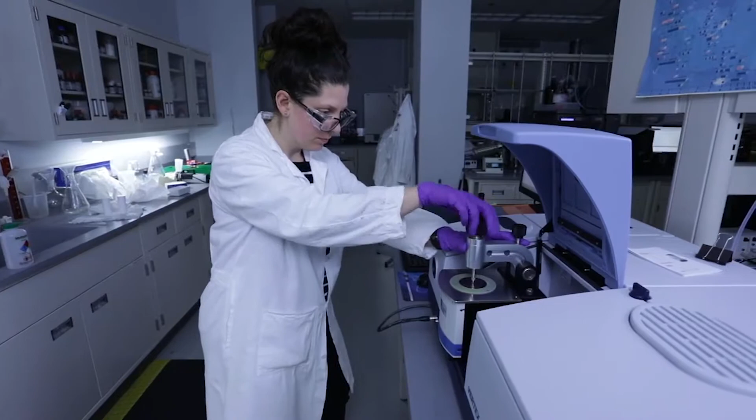NETL is also the only national lab dedicated to fossil energy research and development, which makes our team a sought-after national and international resource. Our lab is a hidden gem that is having a global impact, and the results of our research have touched the lives of millions of individual Americans as they go about their daily lives.

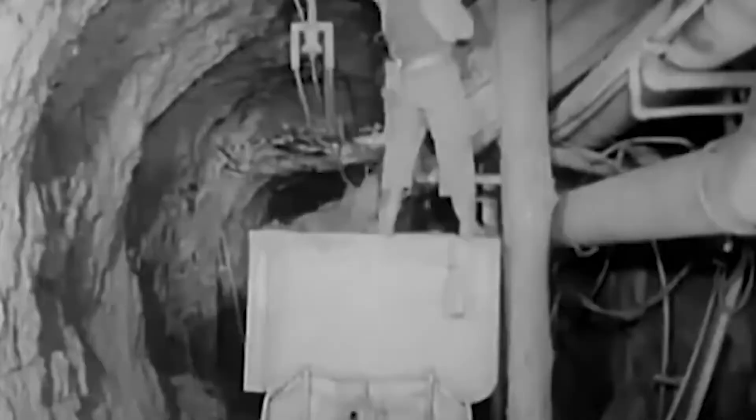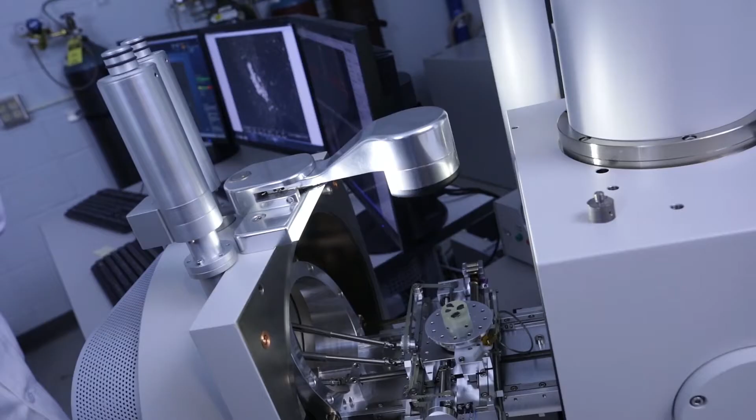From pioneering the technologies that enabled the shale gas revolution, to spearheading carbon capture and storage innovations and developing materials for next-generation energy systems, our forward-looking research continues to position NETL as the nation's renowned fossil energy science and engineering resource. Welcome to NETL. I'm Sean Plasynski, Deputy Director and Chief Operating Officer.

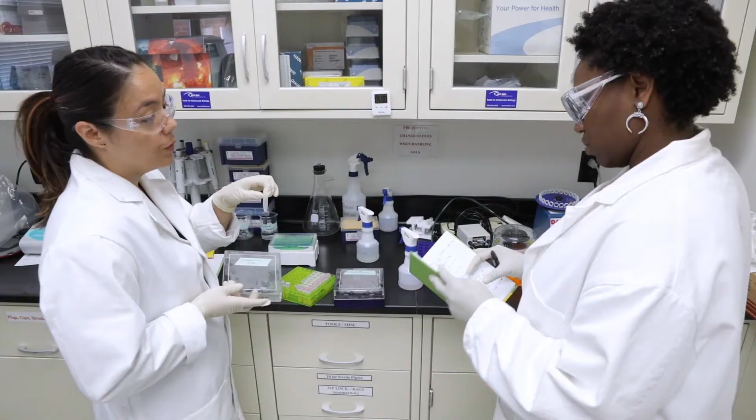NETL's Laboratory Operations Center manages a comprehensive, fully integrated suite of laboratory support services consistent with the NETL mission. Specifically, the laboratory operations responsibilities span facility operations, information technology, environmental safety and health, security and counterintelligence, records management, and human resources. The day-to-day support performed by the site operations support contractor includes R&D support services.

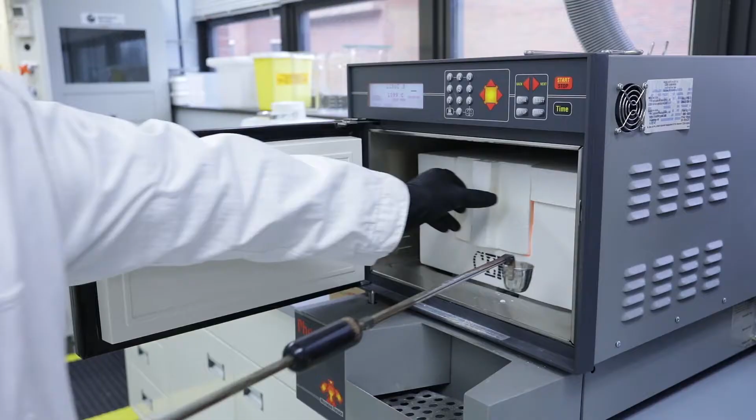This includes the technicians and operators necessary to operate the R&D equipment in our laboratories, and provides safety and engineering support for laboratory safety reviews and design of laboratory equipment. It also includes R&D equipment and materials, covering the purchase and receipt for the research areas.

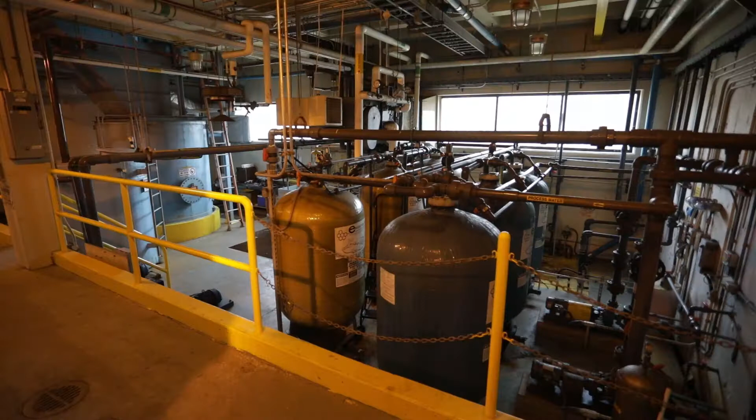Engineering and facility support services include the general engineering labor and materials necessary to complete the engineering, design, drafting, and drawing for various areas such as civil, mechanical, electrical, plumbing, utility locating, and construction inspection services. Facility support also includes maintaining the site's motor pool and shuttle services, warehouse and property management, janitorial and grounds maintenance for the Pittsburgh site.

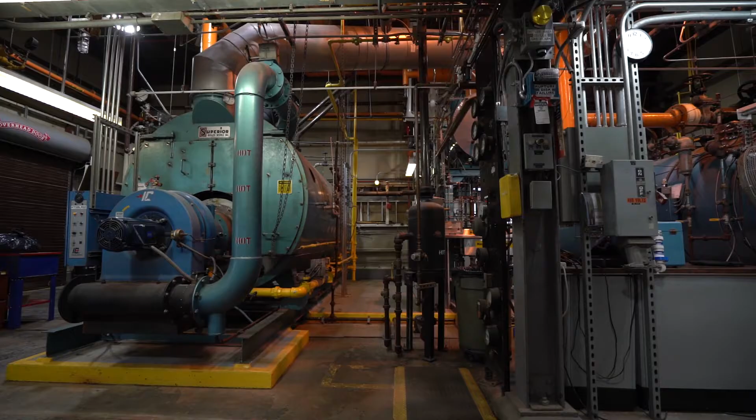Environmental safety and health support services include activities like air, water, and waste control, environmental data analysis, inspection support, and occupational health, which includes access to nurses and physicians—just to name a few of the services they provide.

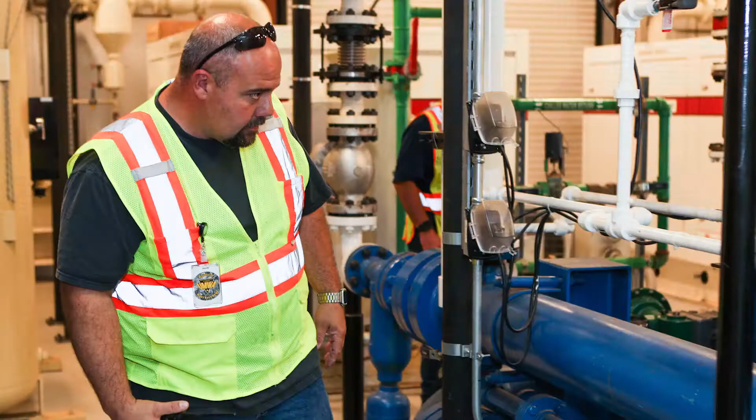The safety program includes reviews of operations, inspections and analysis, emergency notifications, fire and life safety protection, and accident and incident identification. The risk management and response program includes supporting the emergency management program through drills, training, and reporting.

For example, the industrial hygiene program includes exposure and workplace monitoring, ventilation programs, and radiation monitoring, just to name a few. The environmental remediation and disposal services include site monitoring in Wyoming, reporting and compliance with regulatory requirements, identification, characterization, and classification of regulated waste items, and processing items for chemical storage and waste disposal.

The NETL complex includes multiple sites operating as a one lab system. The lab's 3 R&D campuses are located in Morgantown, West Virginia; Pittsburgh, Pennsylvania; and Albany, Oregon. Let's take a closer look at our 3 research campuses.

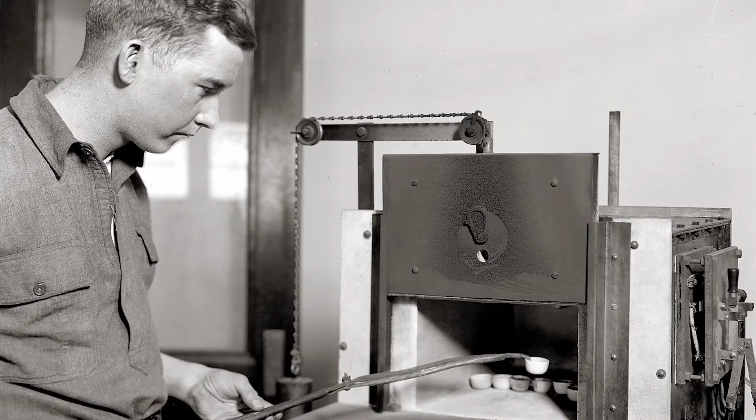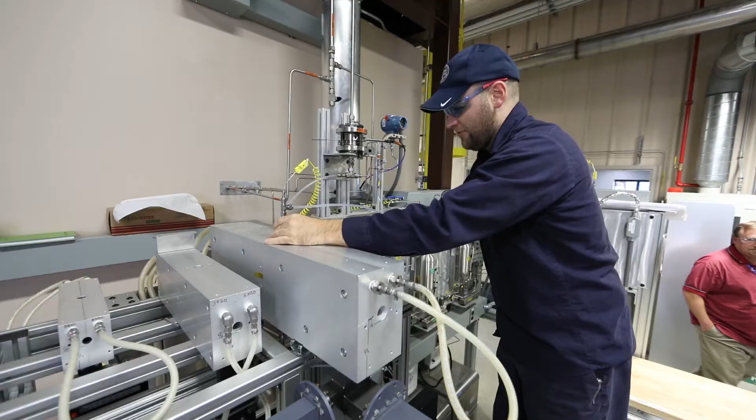NETL's Morgantown site was founded after World War II sparked national interest in synthetic fuels production and expanded federal support for research and development on fossil fuels. The Appalachian Experiment Station, as it was then known, was tasked with finding quicker, cheaper ways of gasifying coal to produce synthesis gas. Today, the Morgantown site plays a pivotal role in advancing innovative energy science and engineering.

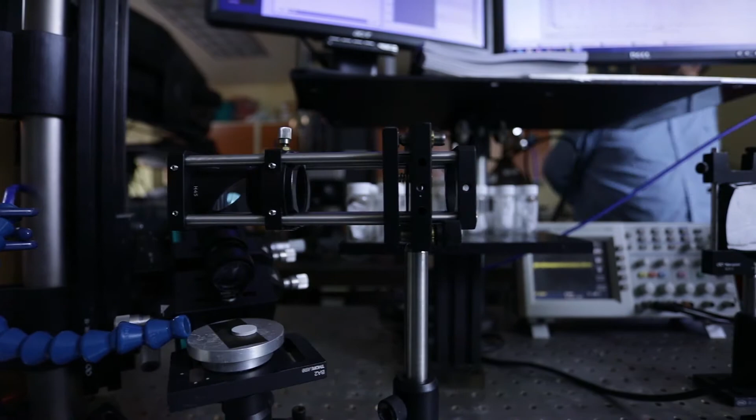With a focus on design and fabrication technologies, including unique specialty work, the site encompasses 48 buildings spanning 455,724 square feet, spread across nearly 140 acres. About 40 acres are occupied by site facilities that house 612 employees, including 226 federal and 386 contract workers.

The remaining 100 acres is covered with scenic woods that offer privacy and security. The replacement value of the Morgantown site facilities is nearly $247 million, with the newest addition, the B39 Technology Support Facility, built in 2008. The building is LEED certified, with a gold rating for the energy conservation incorporated into its design, which includes sustainable building practices and materials, a green roof, and judicious use of natural light and lighting controls for energy efficiency.

Let's take a look at some of our premier research labs in Morgantown. B14, the newly created Reaction Analysis and Chemical Transformation Facility, or REACT for short, supports NETL's energy conversion engineering efforts to increase power cycle efficiency and enable more power generation for less fuel and fewer emissions.

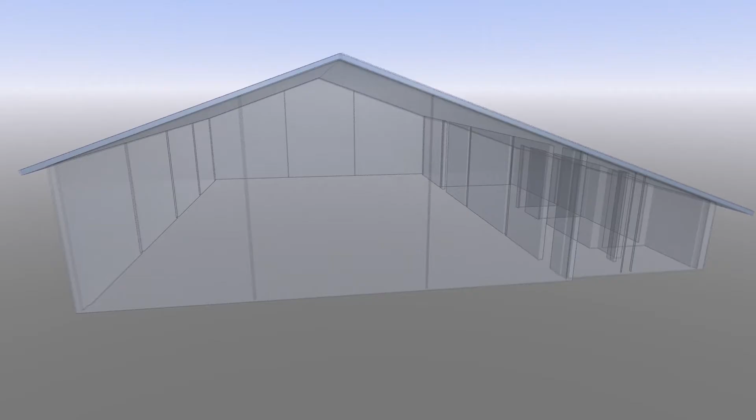The REACT facility features 8 unique reactor systems, including a mix of high-temperature, high-pressure, fixed-bed, and fluidized-bed reactors, as well as advanced microwave and plasma-energized systems. The facility is fuel-flexible, enabling the study of a variety of feedstocks, and is designed for fully automated 24/7 operations.

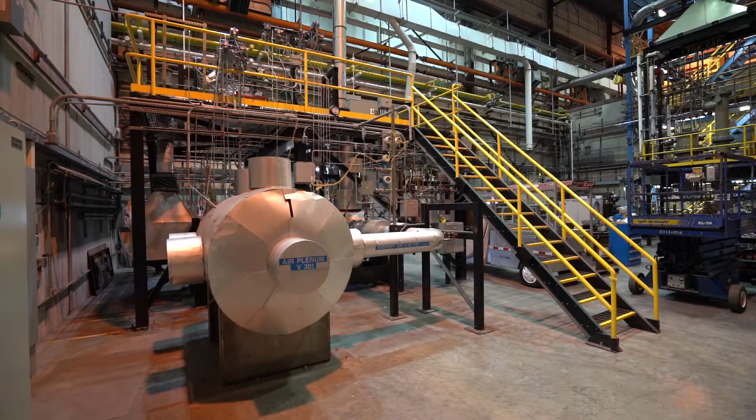Building B4 houses 3 unique laboratories. The Hybrid Power Systems Performance Lab is the only hardware-based cyber-physical simulation of an advanced hybrid power system anywhere in the world. This one-of-a-kind facility develops control strategies and explores operating flexibilities for the reliable coupling of fuel cell and gas turbine technologies.

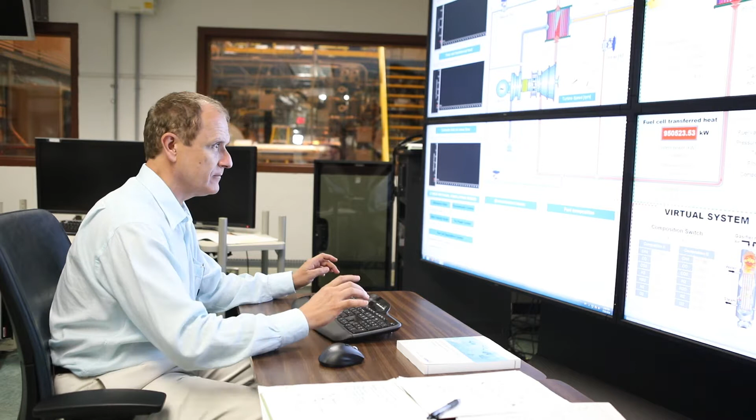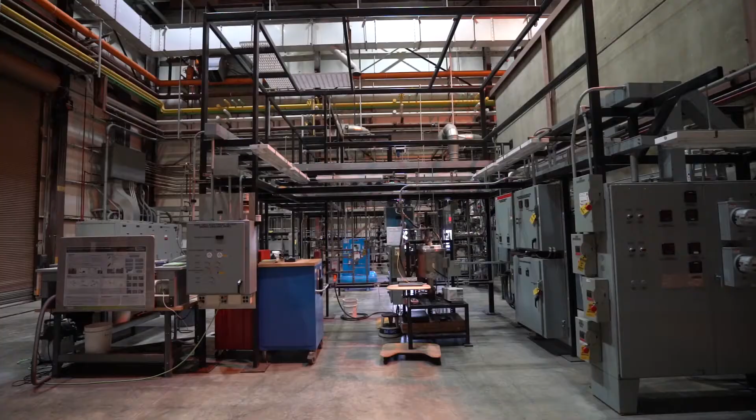The Chemical Looping Reactor Facility is a pilot-scale reactor facility that aims to advance transformational chemical looping combustion technology. The solid oxide fuel cell manufacturing and test labs are equipped to test solid oxide fuel cells and component materials at temperatures up to 1,000 degrees Celsius under various gas atmospheres and operational conditions.

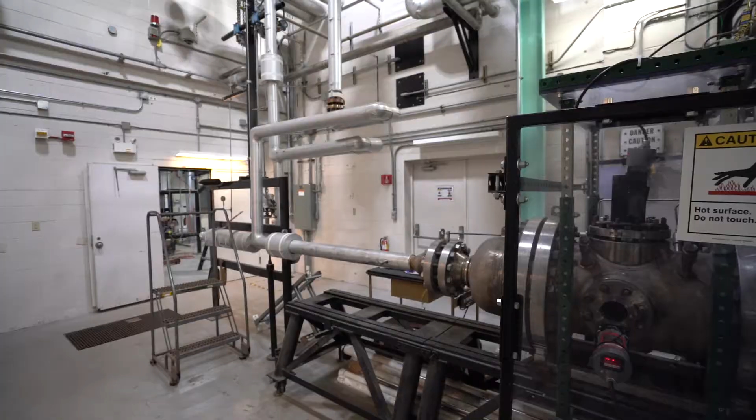B6, the high-pressure gas turbine combustion facility, offers the test capabilities necessary to evaluate new combustion concepts for high-pressure, high-temperature hydrogen and natural gas turbines. To model and study fluid flow and combustion variability, researchers use computational fluid dynamics and the Dynamic Gas Turbine Combustion Test Rig to gain insights into complex combustion processes.

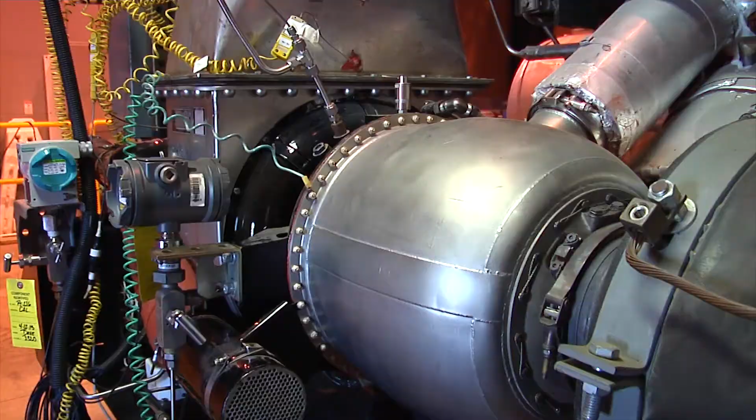The Simulation Validation, or SimVal, unit is a unique optical combustor for analyzing high-pressure combustion and validating computational fluid dynamics models. B17, the Geological Sciences Lab, houses NETL's computer-aided tomography, or CT, equipment, which is used to obtain data on flow dynamics and internal structures of geologic media.

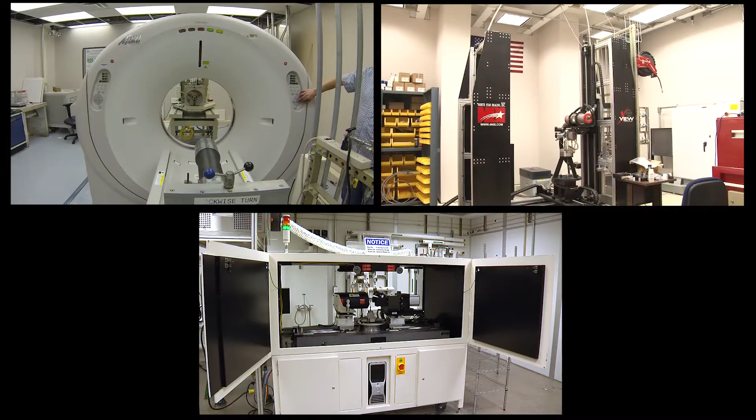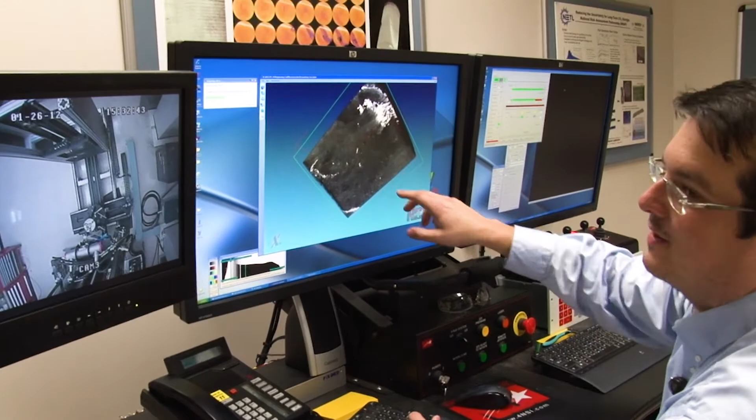The lab's 3 CT scanners - medical, industrial, and micro - enable researchers to examine different phenomena, from dynamic fluid floods within rocks at in situ conditions to the isolation and complexity of pore structures and material features. Research in this facility focuses on examining the fundamental physical phenomena that control flow in the subsurface, including geologic carbon storage, gas and oil production, wellbore integrity, and flow through fractured rock.

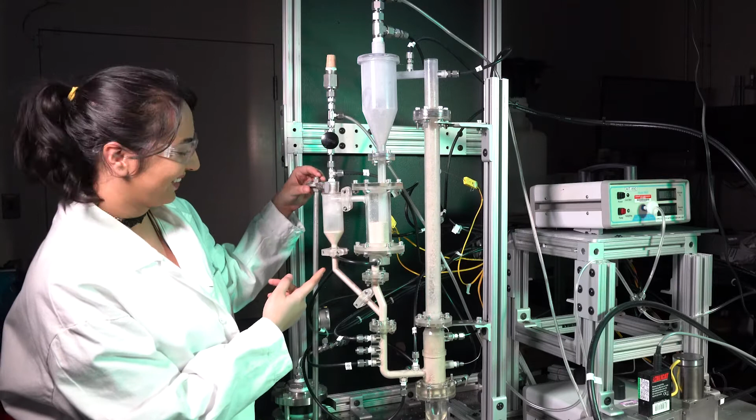Building B25 also serves multiple purposes, housing several critical laboratories. The Multiphase Flow Analysis Laboratory provides tools for fundamental tests on particles and flowing particle systems to support multiphase model development and validation. The lab has capabilities to perform detailed characterization of particles for a broad range of fluidization and particle flow systems, providing fundamental information for accurate computational modeling as well as high-quality data for validation of model predictions.

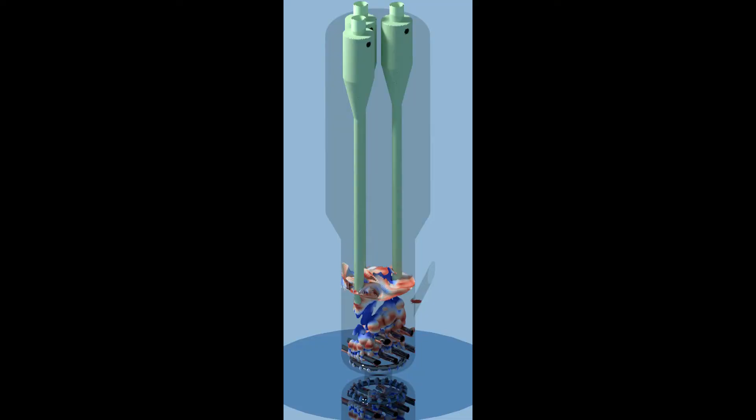The Laser Laboratory is used to develop and demonstrate laser-based sensor technologies that allow for monitoring under extreme conditions, such as high temperature and pressure, for incorporation with advanced next-generation control systems.

Joule is among the world's fastest, largest, and most energy-efficient high-performance computers. The system underwent a $16.5 million investment that increased its computational power by 8 times, ranking it 23rd in the United States and 52nd in the world. Joule 2.0 is housed in an energy-efficient modular data center.

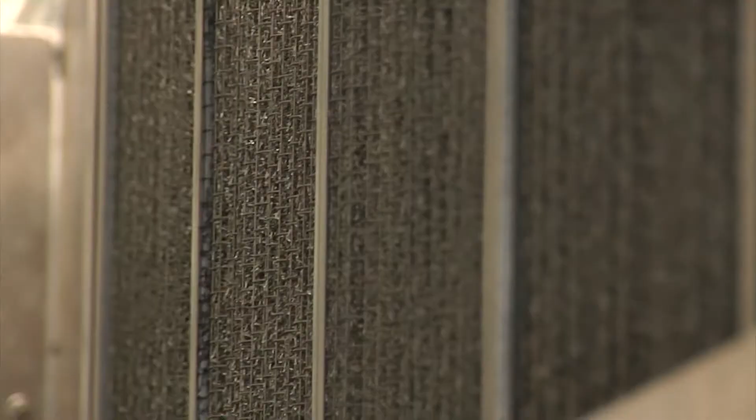Similar to a large air handling unit, the facility circulates ambient air, moved by 48 variable-speed fans, augmented with evaporative media, to cool the supercomputer using just 2 to 5% of the power consumed.

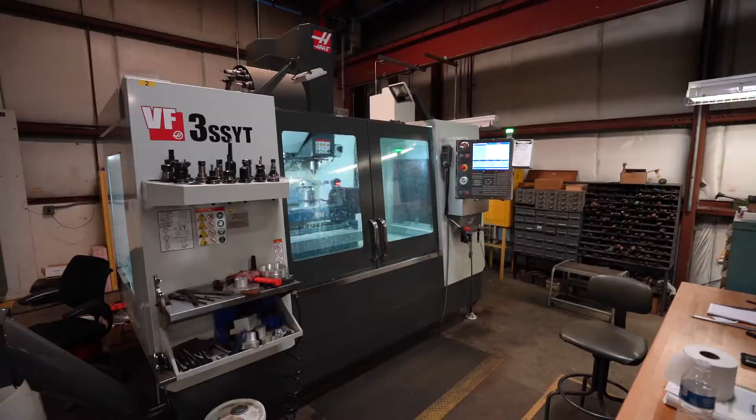In addition to offices and laboratories, the NETL Morgantown site features a large machine shop with both traditional and state-of-the-art computerized numerical control machining capabilities, a children's daycare facility that has geothermal heating and cooling as well as solar power and lighting features, a fitness center, an occupational health unit, an independently operated cafeteria, and a 349-space parking garage.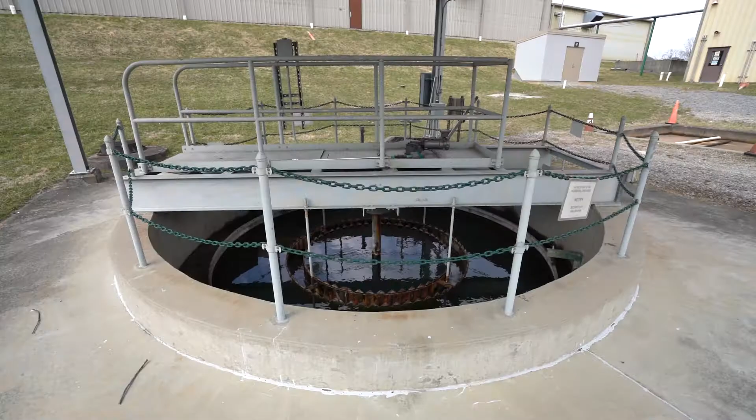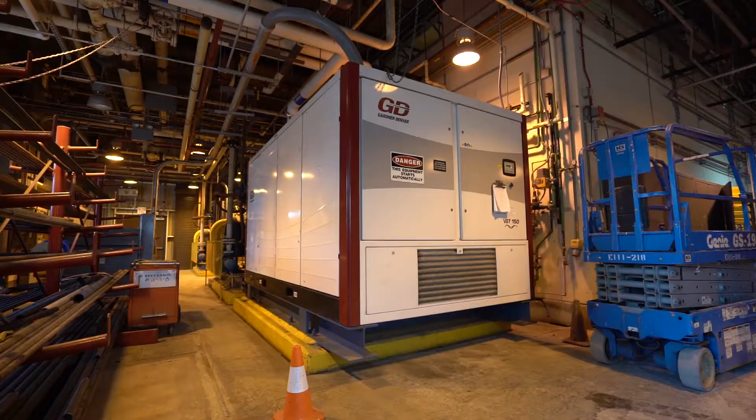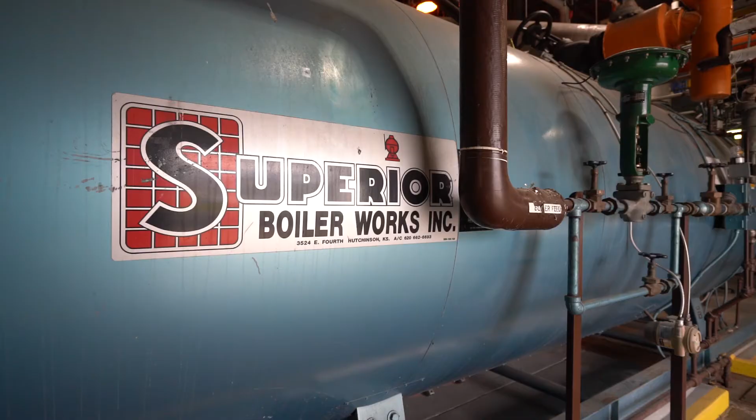Morgantown also has several unique infrastructure capabilities, including a dedicated water treatment collection and processing facility for industrial waste, a 23 kilovolt to 4,160 volt electrical substation and underground distribution network, a compressed gas system that provides 100 and 700 psi air, compressed nitrogen, compressed natural gas, and high-pressure hydrogen, a central steam boiler and chiller that serves several facilities throughout the site. In support of the R&D program, a dedicated process cooling tower and associated underground distribution system provides process cooling water to buildings 4 and 6.

A motor pool area is designed to maintain NETL's fleet of vehicles, which includes alternative fuel vehicles and shuttle vans used 4 days a week to facilitate travel between the Morgantown and Pittsburgh sites. Snow removal from roadways is included in site operations and features a dedicated bulk salt storage facility.

NETL Morgantown also features a large warehouse and a dedicated hazardous waste handling facility where regulated materials are collected and prepared for disposal. Field communications capabilities at the facility are enhanced by a dedicated radio repeater system with dedicated channels for operations and other groups.

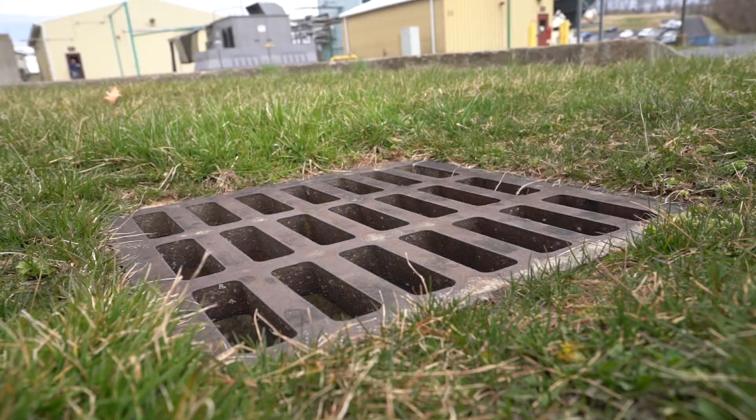NETL is an ISO 14001 and OHSAS 18001 certified facility. Key aspects of the environmental support functions at the facility include dedicated groundwater monitoring wells, stormwater management and protection as well as associated sampling, and industrial wastewater system operation, which is permitted through publicly owned treatment works. The Morgantown facility does not currently require an air permit, but air emissions are inventoried to ensure ongoing compliance.

NETL is an OSHA-regulated site, and safety oversight is provided by a mix of federal and contractor workers. Other significant support efforts managed by the Environmental Safety and Health Program include safety analysis and review systems, industrial hygiene, emergency response, and technical support of external remediation efforts that are federally managed from Morgantown.

NETL's Pittsburgh site is located within Allegheny County, Pennsylvania, at the Bruceton Research Center, approximately 13 miles south of Pittsburgh in South Park Township.

NETL shares the Bruceton Research Center with CDC NIOSH, the Center for Disease Control National Institute for Occupational Safety and Health. The U.S. Department of Labor's Mine Safety and Health Administration also occupies part of the CDC NIOSH grounds. NETL Pittsburgh is unique among NETL's research sites because it comprises 4 separate facility plateaus: administration, research laboratories, daycare facility, and a fitness center. Employees access various roads, including township, state, and railroad crossings, to travel between the various plateaus, in some cases passing through CDC NIOSH.

The lab has an asset replacement value of $207 million. 547 employees work at NETL Pittsburgh, including 224 federal and 323 contractor staff. The site operations support contract supports NETL Pittsburgh's 30 buildings and 57 acres, including janitorial and ground services. The campus holds 431,000 square feet of building space, including a maintenance shop, a warehouse, a recycling facility, a children's daycare facility, and a fitness center.

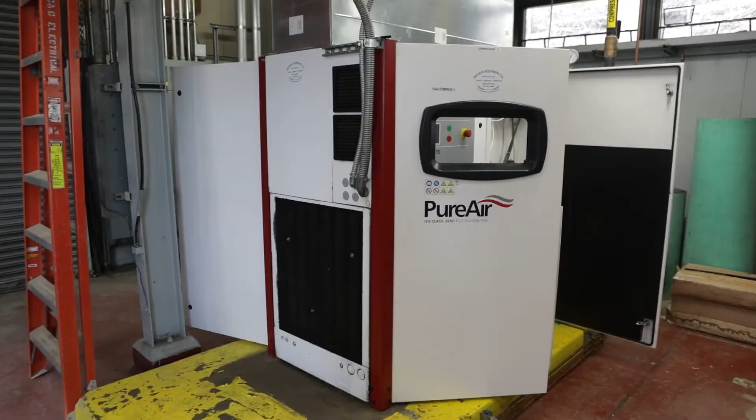Pittsburgh also has several unique infrastructure capabilities, including a dedicated chemical handling facility where regulated materials are accumulated for disposal, a dedicated wastewater treatment collection and processing facility for industrial wastewater, a machine shop, a compressed air system that provides 100 psi air to laboratory buildings, a 100 psi nitrogen distribution system, including an 11,000-gallon liquid nitrogen storage tank with a liquid nitrogen Dewar filling station, an electrical substation, an occupational health unit, and an independently operated cafeteria.

A motor pool area is designated to maintain NETL's fleet of GSA-leased vehicles, which includes alternative fuel vehicles, all-electric vehicles, and shuttle vans used 4 days a week to facilitate travel between the Morgantown and Pittsburgh sites. An on-site fueling station with storage tanks of E85, diesel, and gasoline is used to refuel on-site vehicles and equipment. 2 electric vehicle charging stations are installed to charge government and employee vehicles.

Snow removal from roadways is included in site operations and features a dedicated bulk salt storage facility. Field communications capabilities at the facility are enhanced by a dedicated radio repeater system with dedicated channels for operations and other groups. NETL is certified to the ISO

14001:2015 and OHSAS 18001:2007 standards, which require environmental, safety, and health conformance. Consequently, conformance to these standards is the basis for NETL's Environmental, Safety, and Health, or ES&H, management system. Key aspects of the lab's ES&H support functions at Pittsburgh include dedicated groundwater monitoring wells and stormwater management and protection, as well as associated sampling.

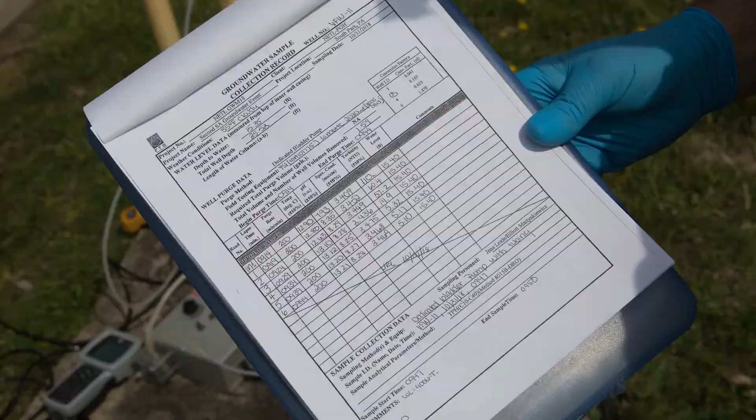ES&H support functions also include industrial wastewater system operation, which is permitted through the publicly owned water treatment works. The Pittsburgh facility does not currently require an air permit, but air emissions are inventoried quarterly to ensure air quality standards are not being exceeded.

NETL is committed to being OSHA compliant. The safety oversight function is provided by a mix of federal and contractor staff. In addition, ES&H program support also includes the safety analysis and review systems, industrial hygiene support, and emergency response support.

Much of the research and development at the Pittsburgh campus focuses on wet chemistry. Here are some highlights of our research labs.

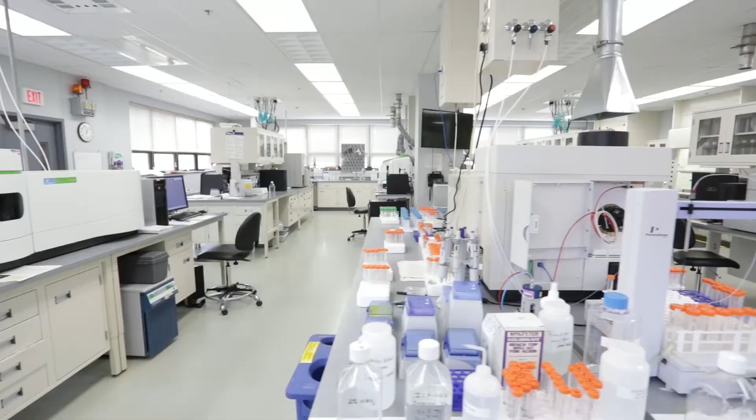B83, the Analytical Lab, conducts research on rare earth elements, or REEs, investigating the economic feasibility of recovering REEs from U.S. coals and coal byproducts. The research is focused on developing process designs that minimize or reduce the environmental, safety, and health impact of radioactive and other byproducts of REEs, and optimizing the overall economic benefits of the separation and recovery process. Characterization of materials containing REEs is key to developing technology and processes that will provide reliable and competitive domestic sources of REEs, metals critical to today's technology.

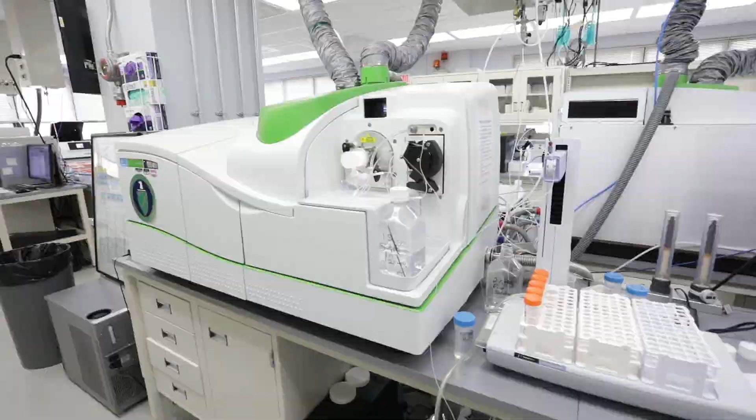B84, the Subsurface Experimental Lab, focuses on enhancing carbon storage technologies through the use of pressure vessels that simulate the pressures and temperatures found deep underground. Studies in this laboratory evaluate the impact of multiphase flow, chemical precipitation and dissolution, and geomechanical stress on flow properties. The Subsurface Experimental Lab equipment makes it possible to accurately characterize geologic formations and predict how carbon dioxide, or CO2, will behave following underground injection.

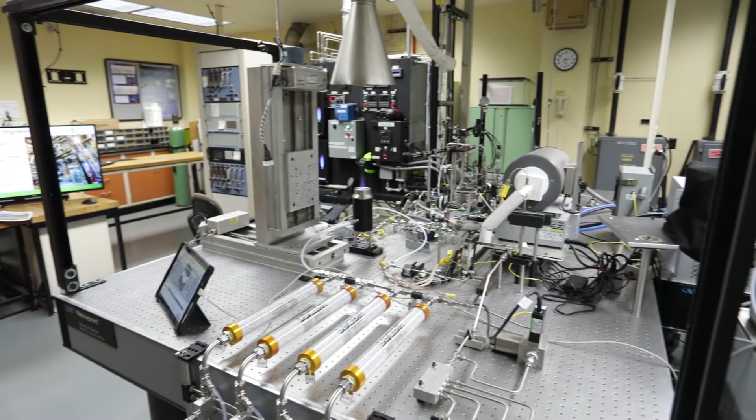B84, the Combustion Fundamentals Lab, focuses on advanced power generation concepts that utilize oxy-combustion. In this lab, researchers sample product gases from a flat flame burner operated with pre-mixed oxy-fuel with steam and CO2 dilution. The properties measured for the oxy-fuel flame provide valuable data to validate fundamental simulations of advanced energy concepts.

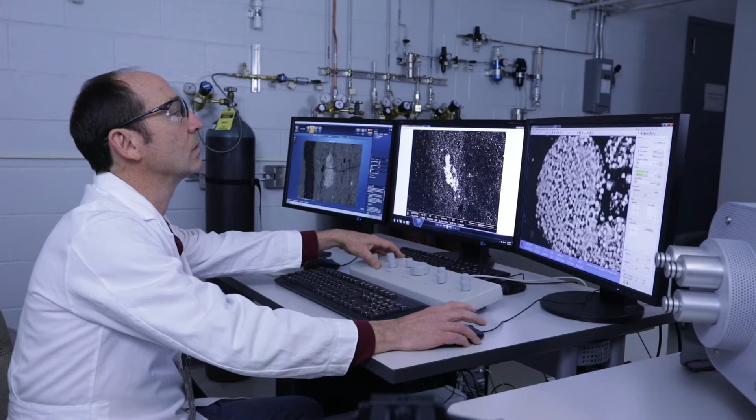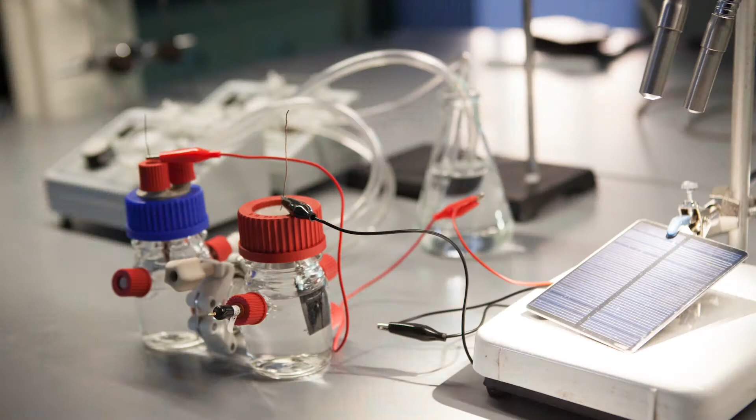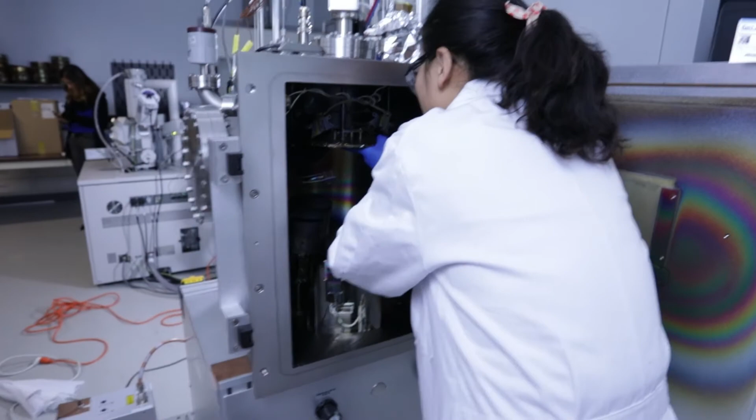B94, the Computational Materials Engineering Lab, is performing research related to using domestic coal and coal byproducts as a manufacturing feedstock for carbon materials. These materials include lightweight carbon fiber composites, carbon additives for construction materials, battery and electrode materials, and carbon nanomaterials. Research takes advantage of NETL's Functional Materials Development Center, which contains 5 floors of synthesis laboratories, instrumentation, and personnel for manufacturing and testing functional materials.

Research also takes advantage of NETL's Carbon Materials Manufacturing Facility, which contains specialized synthesis equipment and personnel for processing coal and producing 5 to 10 liter batches of graphene fluids for materials manufacturing applications.

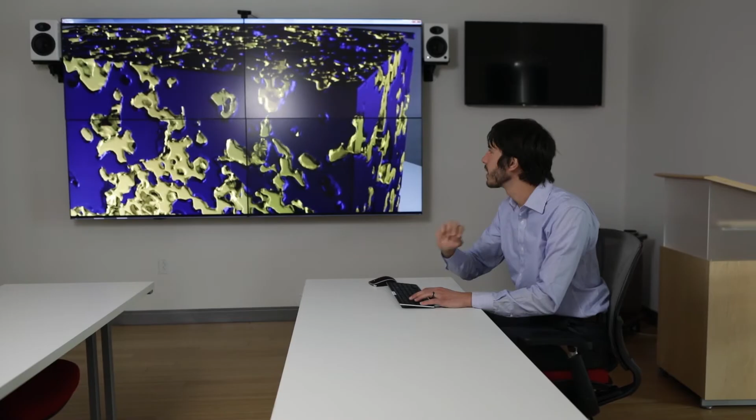NETL's Albany Lab traces its origins to 1943, when President Franklin D. Roosevelt announced that Albany was selected as the site for the new Northwest Electrodevelopment Laboratory. Today, NETL's Albany Research Facility is the site of leading-edge metallurgy and materials research.

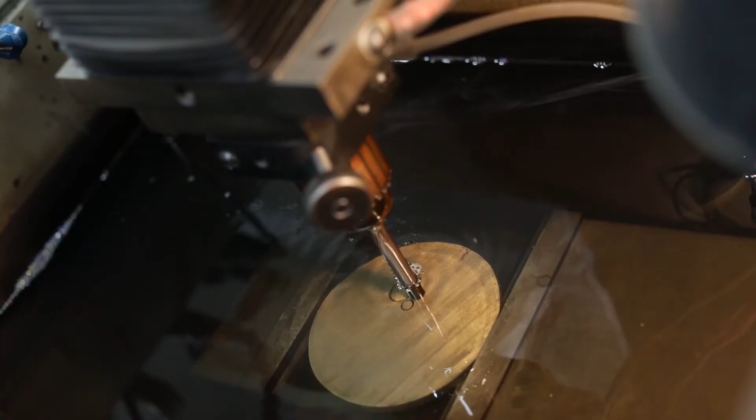NETL Albany is composed of 38 buildings, with 253,894 square feet of building space on 43.9 acres, with some buildings eligible for listing in the National Register of Historic Places. In addition to offices and laboratories for conducting cutting-edge research aimed at developing technologies to enhance our nation's energy dominance, the facility includes sheet metal, welding,

carpentry, electrical, machine and plumbing shops, a hazardous waste facility, and chemical storage facilities. The lab has an asset replacement value of $115.9 million.

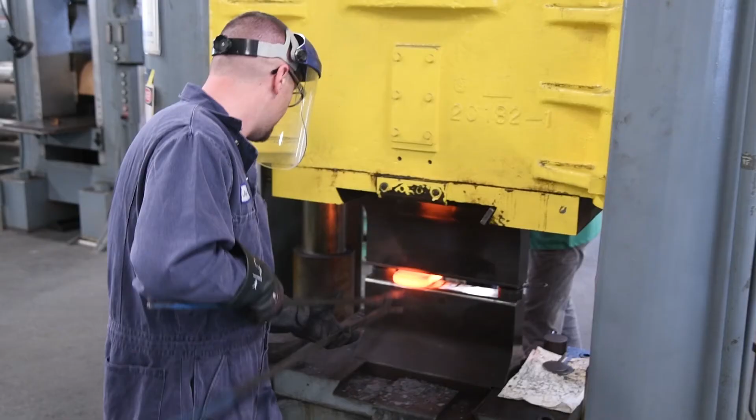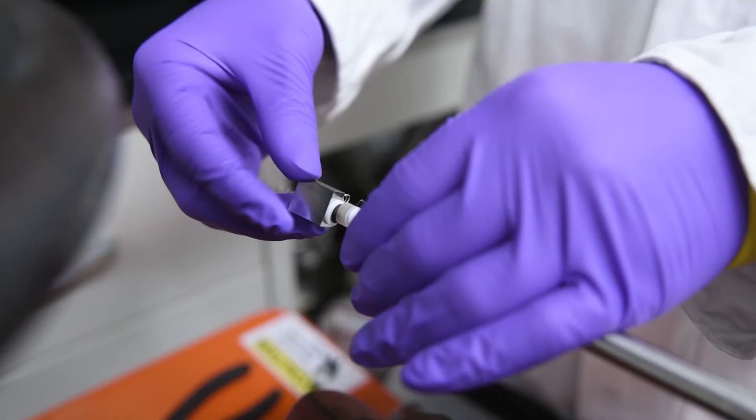126 employees work at NETL Albany, including 35 federal and 91 contractor staff. Our facilities include bench and intermediate-scale metals fabrication and melting capabilities, a full complement of metal processing and materials characterization, materials performance capabilities, and computational resources necessary to design and engineer new structural materials, advanced subsurface technologies, and direct power extraction. Continued upgrades are required to maintain strong capability in these domains.

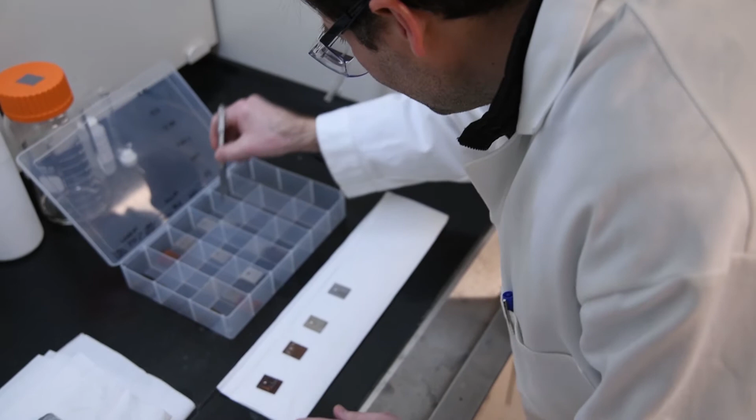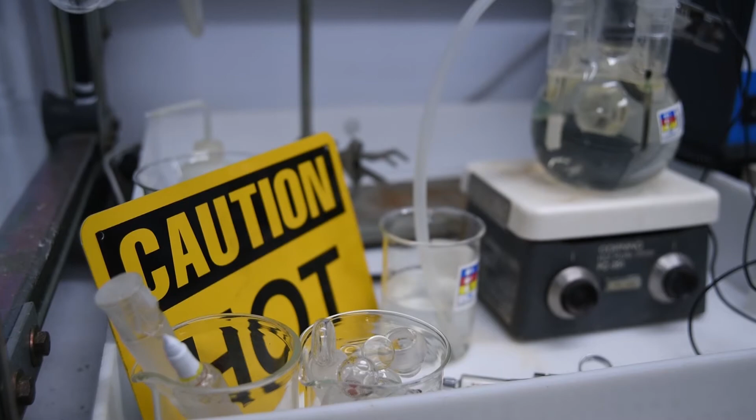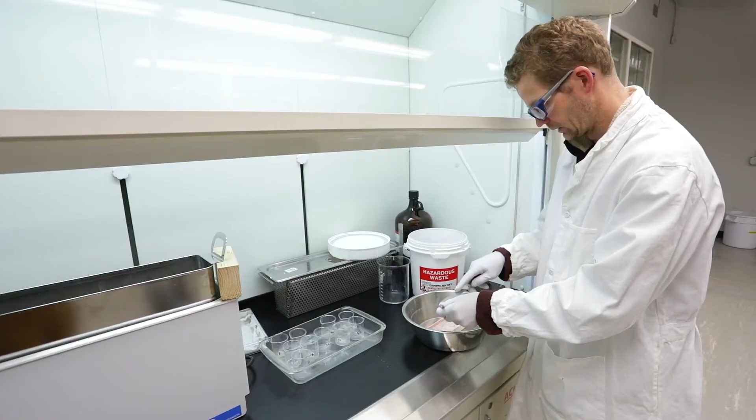NETL's capability in structural materials research is anchored by its substantial alloy fabrication and performance testing facilities, which deliver high-performance, affordable materials that enable diverse energy technologies. Researchers specialize in the design, fabrication and manufacturing, performance assessment, and performance prediction of heat and corrosion-resistant alloys. Complementary computational materials research is integrated into these activities to guide alloy development and manufacturing research and to predict materials performance. Research focuses on cost-effective materials for severe stress and corrosive-erosive environments with service life of 100,000 hours.

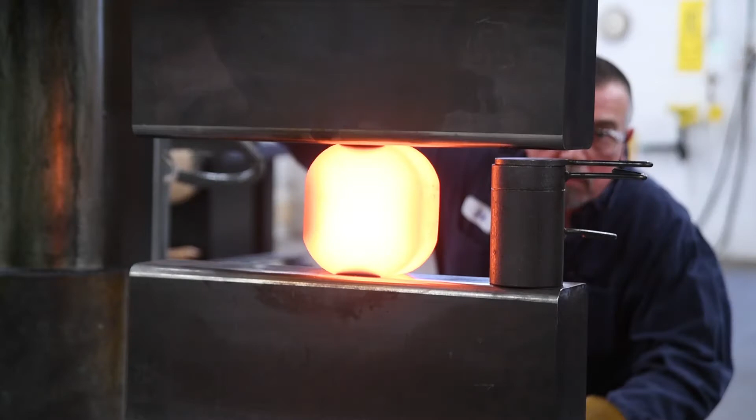NETL maintains a complete alloy development research capability, which includes the metals melting facility and the metals fabrication laboratory. Because of NETL's scale of alloy production capabilities, NETL's alloy solutions readily translate into industrial practice. This capability has been used to advance the DOE mission and has also been leveraged by other government agencies and the private sector to provide alloy solutions to materials challenges in the defense, aerospace, and biomedical fields.

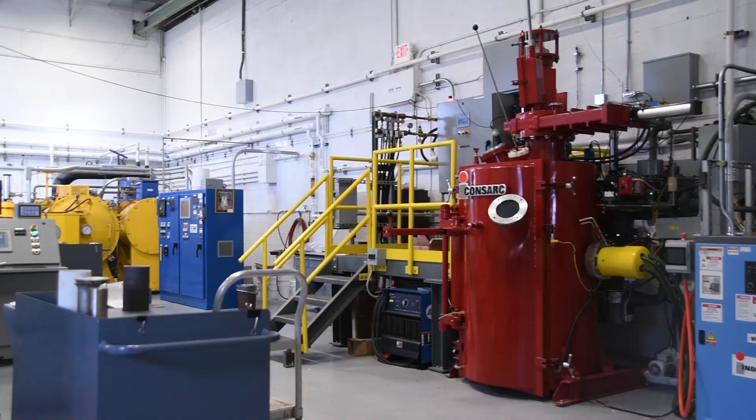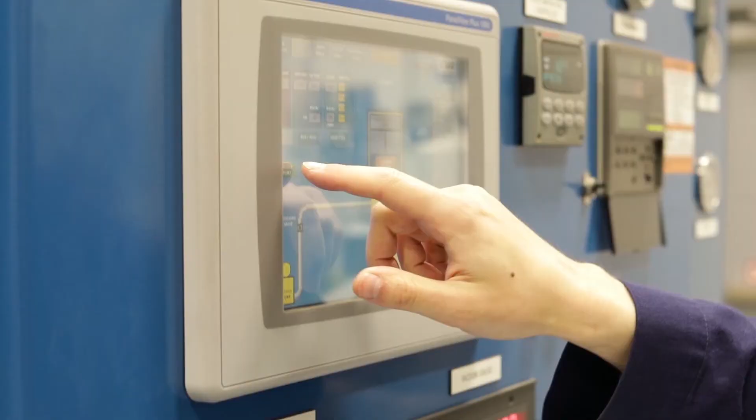Here are some highlights of our research labs. B4, the metals melting facility, is used to formulate unique alloys designed for use in extreme environments. Metals are developed in the laboratory's high-temperature furnaces, and molds are used to cool the resulting alloy into ingots, which are then heat-treated to homogenize the structure.

Formulated metal alloys are machined using a bandsaw, lathe, and other equipment in preparation for hot working in the fabrication facility. The metals melting facility can melt any metals needed for NETL research, resulting in batches ranging from a few grams to over 400 pounds.

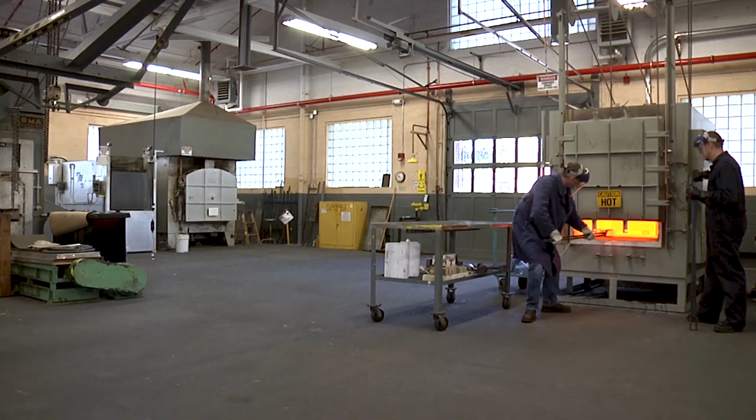Alloy ingots are typically produced by air induction melting, vacuum induction melting, vacuum arc remelting, electroslag remelting, or button melting operations. B30, the Metals Fabrication Laboratory, specializes in the research to produce plate and other shapes needed for assessment of new alloys for use in energy-related applications.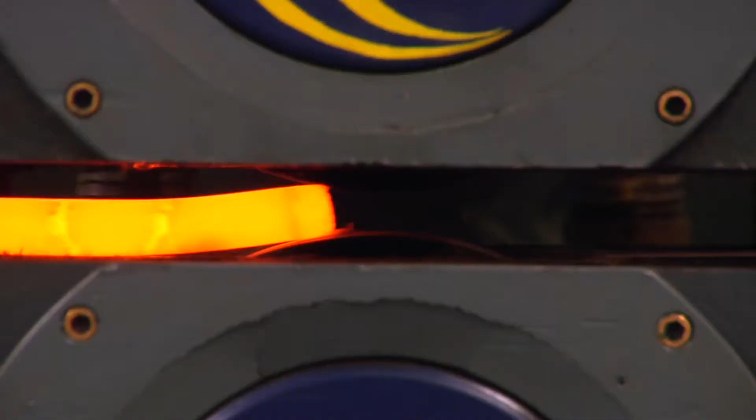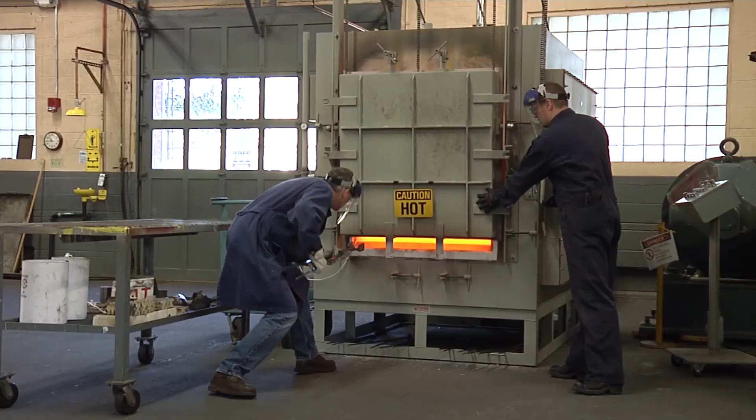Ingots come to the laboratory from on-site melt operations and are formed into plates, sheets, rods, and other shapes. The techniques employed mimic industrial manufacturing processes, resulting in useful microstructures that are key to evaluating a material's performance. Most operations in the laboratory are considered hot working and are performed on heated materials. The laboratory's equipment includes large heat treatment furnaces, a 500-ton hydraulic press, and a 750-ton hot rolling mill.

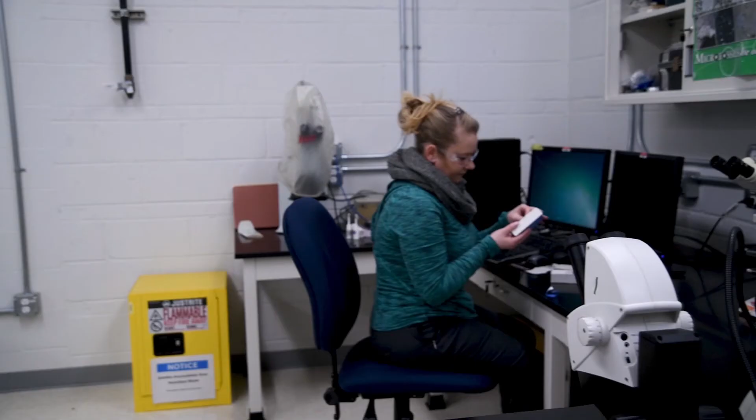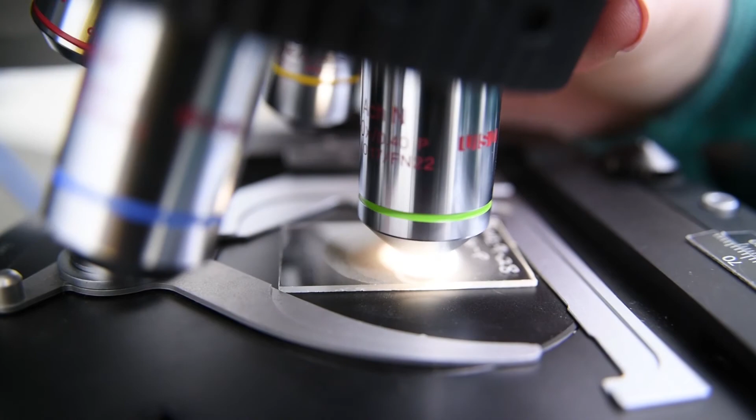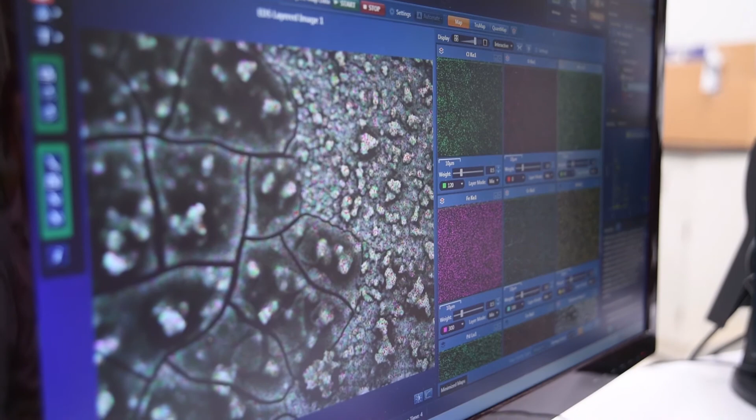B31. The analytical laboratories allow for the analysis of engineered and natural materials from the nano to macro scale. NETL Albany's petrography and metallography capabilities include optical microscopy, electron microscopy, confocal laser scanning microscopy, and X-ray diffraction. The use of microanalysis, combined with image processing visualization techniques, allows for the identification and quantification of elements and phases of interest. NETL leverages materials characterization capabilities resident at all three sites to provide access to capabilities.

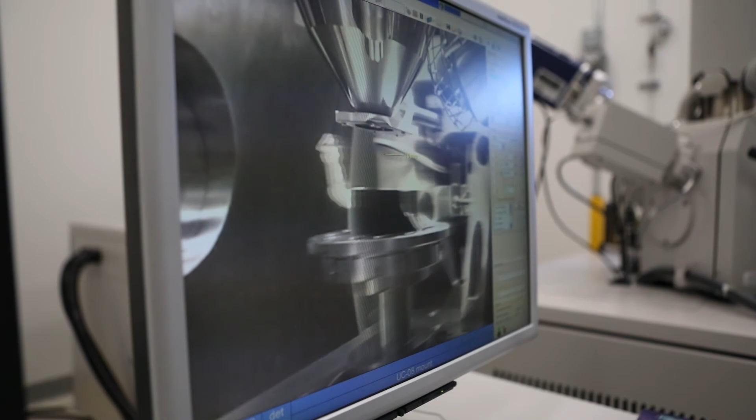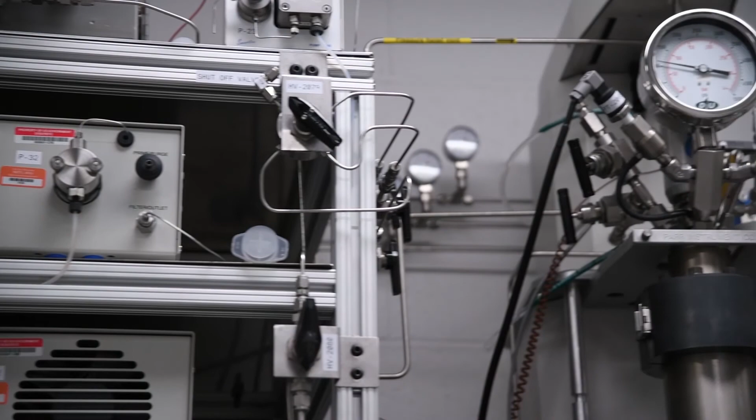B26, the High-Pressure Immersion and Reactive Transport Laboratory, is a multifunctional, state-of-the-art facility capable of performing geological studies at simulated depths up to 10,000 feet, providing an experimental basis for modeling of various subsurface phenomena and processes. The laboratory has a wide range of tools and instrumentation to ensure a complete cycle of scientific studies. The laboratory contains rocking autoclaves and continuously stirred autoclave reactors, which are used to conduct experiments at high pressures and temperatures to investigate geochemical interactions.

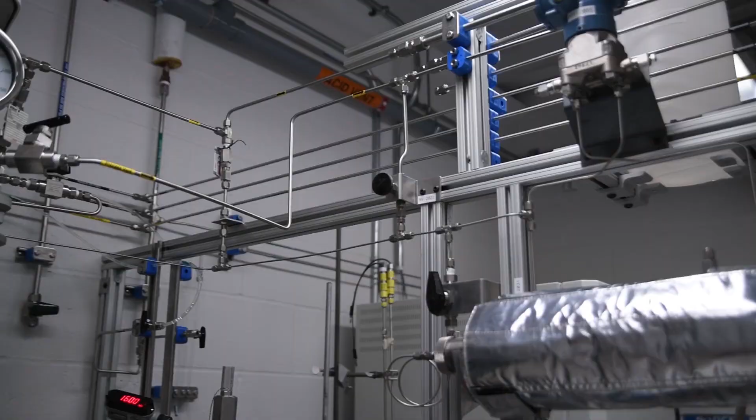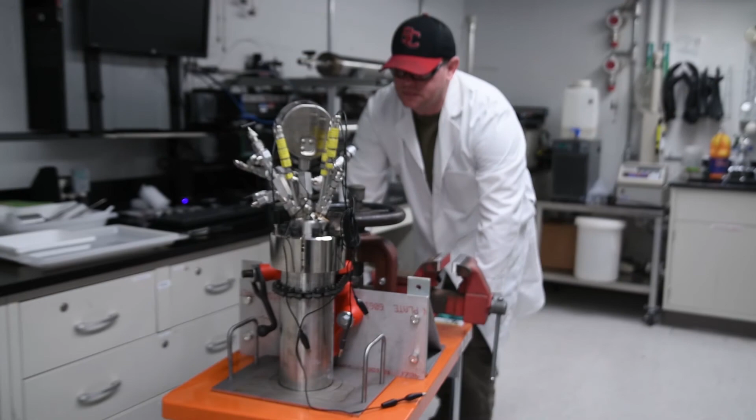The laboratory also includes several flow-through systems that can simulate CO2-enhanced oil recovery, CO2 water-rock interaction of core samples under CO2 storage conditions, and simulate the interaction between drilling fluids and the borehole wall.

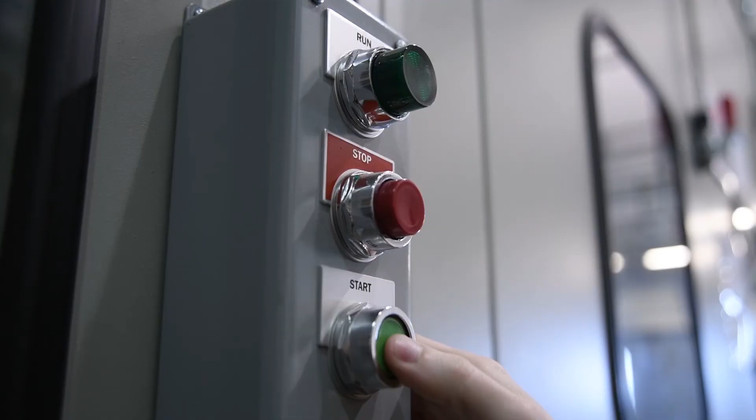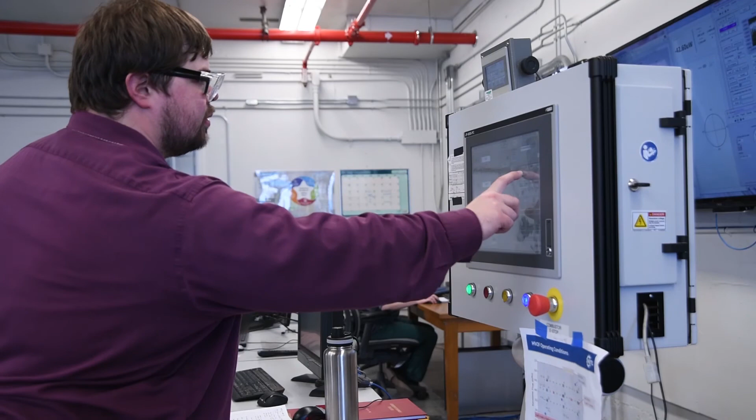B24. The MHD laboratory is used to perform model validation for magnetohydrodynamics, or MHD, energy conversion applications. The lab is also used to conduct materials performance evaluations for those applications. MHD is a scientific discipline interested in the interaction of an electrically conductive fluid with a magnetic field. An MHD generator is a new type of turbine in which usable electric power is generated without any moving mechanical parts. This process of MHD energy conversion is sometimes called direct power extraction.

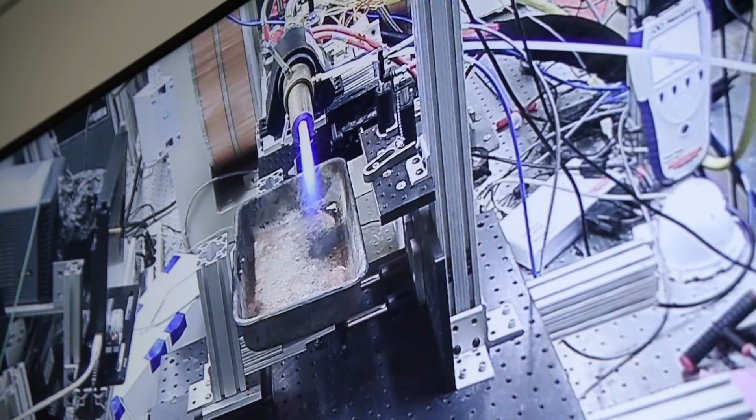Major test hardware in the lab includes an oxy-fuel combustion system capable of producing high-temperature supersonic gas flows, a 3 Tesla capable electromagnet, and an ultraviolet excimer laser.

NETL is one lab, operating as 3 research sites to provide technology solutions to America's energy and environmental challenges. The Site Operations Support Contract is instrumental in ensuring smooth, productive operations at these 3 research sites in Pittsburgh, Pennsylvania, Morgantown, West Virginia, and Albany, Oregon.